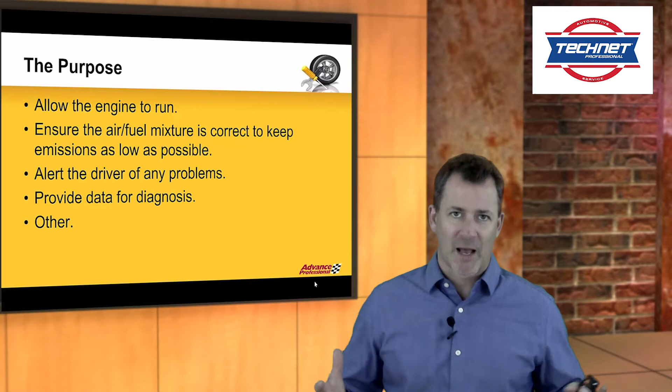It sends a lot of data to a lot of other computers. It keeps an eye on a lot of things, including where you are sometimes. And let's just say right now that the engine control system is very, very complex. So the simpler we keep it, I think the better off we're going to be.

Now, this diagram that you can see here just shows the very basic process that goes on with engine control. It's a computer. You'll see it called the ECM or the PCM. There's all kinds of acronyms for it. The bottom line is it's a computer, and computers really do three things.

They receive input, and it doesn't matter whether it's your computer that you type on every day, that input is you typing. In an engine control computer, it is input from various sensors throughout the automobile. It receives this input, it does some math, it does some processing, and then it controls some sort of output.

So the inputs that you can expect for the engine control system might be from the mass airflow sensor, from a crank position sensor, a camshaft position sensor, maybe the O2 sensor, various temperature sensors, and there's only a couple listed here. This is only a real brief list of the potential sensors. It takes input in terms of voltages or signals from these different sensors, and it does some sort of processing.

And there are really three different ways that it processes it. It either does the math on its own, because it has the programming to do that, or it has pre-programmed data, and it says, hey, you know what, when these values come in that look like this number from these sensors, then here's what I do.

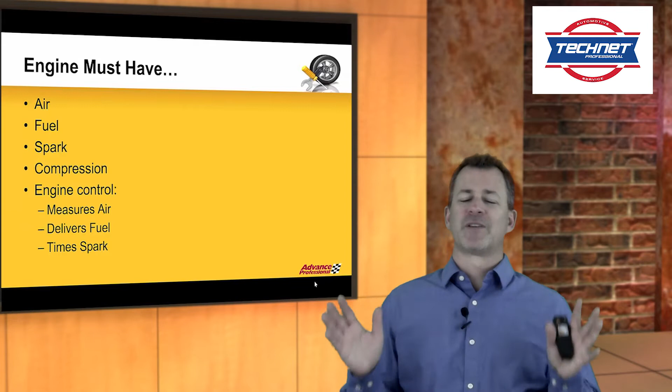The engine control system, with all those inputs, processing, and outputs we just talked about, really just measures the air, delivers the fuel by opening or closing a valve, and times the spark - because if the spark doesn't happen at the right time, nothing good's going to happen. Air, fuel, spark, compression - the engine control will measure the air, deliver the fuel, and time the spark. If you want to get really technical, it can control compression today, but for all intents and purposes, let's say it doesn't have a whole lot to do with compression.

The very basic fuel injection system being controlled by the engine control system is comprised of these inputs - some sort of measurement of how much air is coming into the engine. That would be the MAF sensor or the MAP sensor - the mass airflow sensor, if you will, or the manifold absolute pressure sensor. That determines the air that's coming in. It will have one or a combination of those.

It's got crank sensors and cam sensors because it's going to tell it where the pistons are and where the valves are in terms of their physical positioning, so we know when to deliver the fuel and whether they're open and closed or ready for us to spark.

Temperature sensors - we got to know what the temperature is of the incoming air, because that will determine how much fuel we should add or take away. The colder the air, the more fuel we're going to want to give it. Because it's got more oxygen in it. So we use all of these sensors to gather the data so we can do some math.

The last sensor here, that we'll get back to in a little bit, is the oxygen sensor - that's a very relevant input. It's a feedback sensor. It does look at what the result of all these outputs were, but it's a critical input for the next fuel injection cycle.

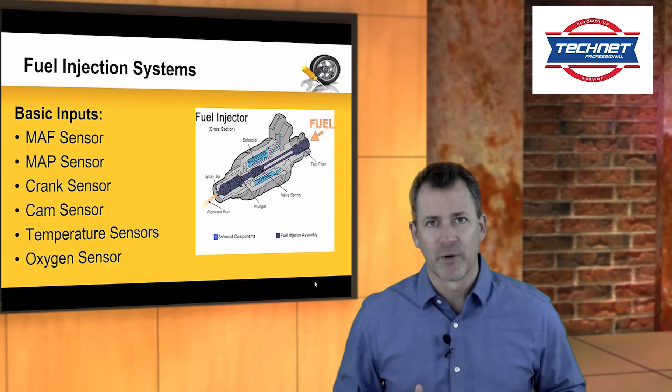Now, of course, if we're going to have fuel delivered through an injector, we've got to have some fuel components. Here are the fuel components that are going to be controlled as part of the engine control system. You've got the fuel pump, the fuel tank holds all that fuel, and you may have a pressure regulator in the tank - usually today as part of the fuel pump, sometimes still separate. There's fuel lines, and this electronic control module is actually going to run the fuel pump, and you may even look at fuel pressure.

So I could have a fuel pressure sensor as part of this as well. There are many, many components that the engine control system has to control. Remember, it's inputs, processing, and outputs. That's all it is. You don't need to know the nuances of all of that.

Some of the ignition system components. Remember, we're going to deliver fuel. We're going to have a tank full of fuel, and a fuel pump we'll turn on to pump that fuel up to the fuel injector. The injector is just an open or closed door. Once we open the door and let some fuel in, at some point we need to give it a spark to ignite this. That's what the ignition system does.

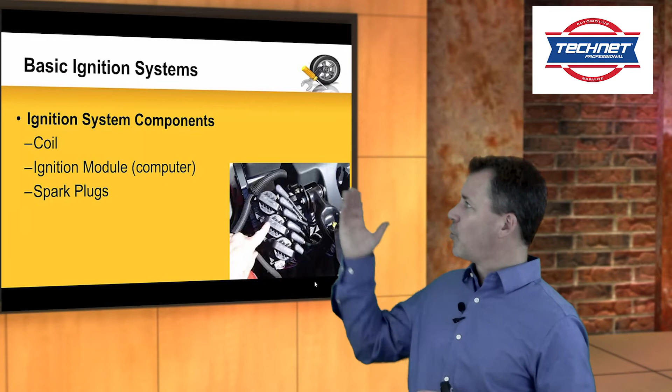The ignition system components, real simply, are a coil, an ignition module which is a separate ignition computer, and some spark plugs. Do you want to throw in the distributor cap, a rotor, some spark plug wire? Sure, we could talk about that too. But today's automobiles don't have any of that stuff anymore. They've got coils that sit right on top of a spark plug, and a computer that turns that coil on and off to create the spark. We won't get into how that happens, but just trust me, the computer turns the coil on and off, and the spark plugs happily spark away to ignite the fuel we've delivered through the fuel injector, which is an open or closed door.

Now, we do need some input in order to control the ignition system, just like we needed inputs to control the fuel delivery portion of the engine control system. We've got to look at how fast the engine is spinning. We've got to look at where the camshafts are, because that tells us whether these valves are open and closed and whether we're ready to actually create a spark. A lot of that data is processed by the engine control module. Some of it may also be processed by the ignition module. Oftentimes they will work together to time exactly when that signal gets sent to the coil to turn that spark on and off, real simply.

Now, engine control was one thing. That was mixing air and fuel together. All those inputs just determine how much fuel we're going to deliver. We have very little control over how much air, other than what we do with the gas pedal and how far we push our foot down on a simple system. Today's systems actually operate the throttle with an electric motor, and your foot just tells it how far to go.

We monitor the air. We determine how much fuel to deliver to the system. But then, based on our decision, we're going to have too little or too much fuel, and all these other chemical situations happen, because this is all combustion chemistry. Based on what conditions were present and what our decision was in terms of how much fuel to deliver, assuming we're the computer, we have emissions. We have certain chemicals that come out the tailpipe that we just don't want because they contribute in a negative way to everything that goes on around us.

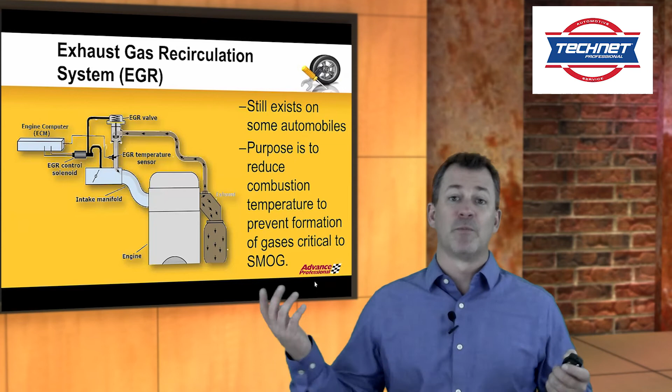The other major emission system that you deal with every day is the evaporative emission system. It's there to capture fuel vapor. That car sitting out there, whether it's 30 below zero or 130 in Phoenix in the summertime, that fuel is sitting there and evaporating. We can no longer vent it to the atmosphere like we used to. Now we have to capture it, hold it, and burn it again when conditions are right. So its job is to capture the fuel vapor, hold on to it, and then recycle it to be burnt in the engine.

The engine control system has to know how much fuel vapor we have so it can control the outputs, letting a little bit in while giving it fuel so we don't mess up our air-fuel mixture. It also has to monitor all of these emission systems for proper operation, which is federal law. In its basic form, it figures out how much fuel to combine with incoming air to make the engine go. In its more complex form, it monitors the air coming in, figures out how much fuel to deliver, and looks at what came out the tailpipe to modify its next decision and reduce emissions. On top of that, it has to monitor all these components for proper operation.

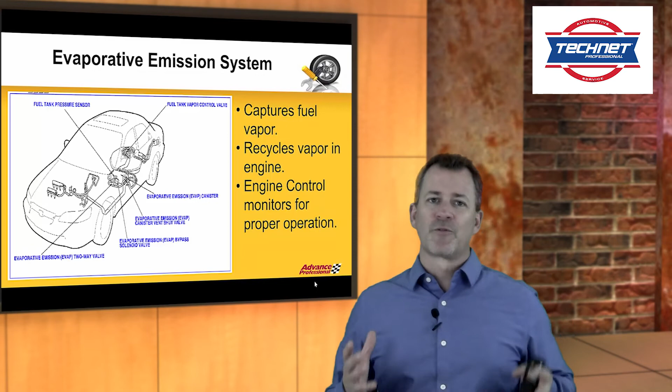The last emission piece is the catalytic converter. I say last piece because there are other devices we won't talk about here—these are the three major systems today. But the catalytic converter is probably the single most important emission device on the automobile. Its job is to burn any unburnt fuel found in the exhaust. The science behind catalytic converters is extremely complex, and we won't get into that, but just know it needs specific oxygen levels and specific fuel-in-exhaust levels to work properly. So the engine control system is always modifying its outputs to try to keep the cat happy. This device is also constantly monitored by the engine control system.

It looks simple, but it's actually quite complex. No, there are no moving parts, at least in this one—yeah, there are a couple out there with some moving parts, but we won't go there. It looks simple, but chemically it's very complex and does a very, very important job.

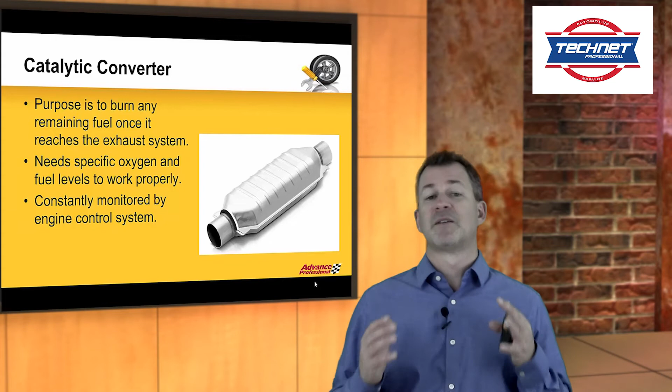Now all of this comes together in what we call the feedback loop. The engine control collects data on how it did—it does the input, processing, output thing. It takes the sensor data, does the processing we talked about, and then controls motors, lights, solenoids, all this good stuff. Then it takes certain sensors in certain positions, such as the O2 sensor in the exhaust, temperature sensors maybe on the EGR system or in the engine itself, and position sensors sometimes, and it looks to see: how did I do? Sometimes it just makes sure the output actually performed what it was supposed to. So if a motor was told to go to a certain position, did it actually go there? That's the position sensor thing.

So that's very simple: okay, I told it to do it—yep, it did it, perfect. Other times it's: the air was coming in at this volume and this temperature, and I decided to give it this much fuel, and I want to see how much fuel is left over. So it uses the oxygen sensor to determine, hey, did all the oxygen get burned up? If it did, then it must have had way more than enough fuel. Did it not all get burned up? How much did I expect and how much did I really get? It takes this feedback, and that feedback becomes an input, and it modifies its output based on that next time. Probably more than what you wanted to know, but just remember: inputs, processing, output.

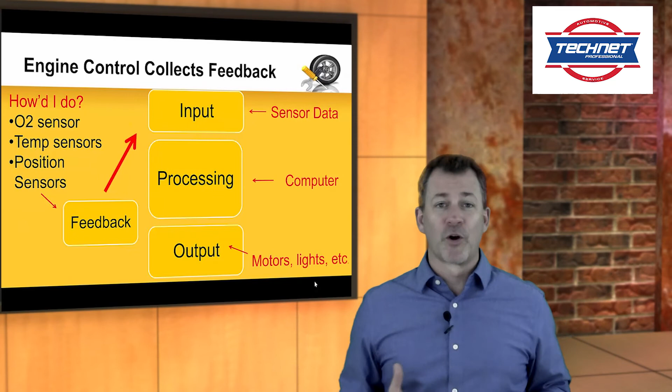When we talk about what could possibly go wrong with a check engine light, when that light comes on, what could it be? It could be anything to do with input, processing, or output. That's really simply what goes on. The system that determines where those problems may be is the OBD2 system, the Onboard Diagnostic System Generation 2. I'll keep this as simple as possible.

This is what controls the check engine light. And that check engine light, by federal law, has to turn on if anything might go wrong with the system that could possibly raise emissions levels to 1.5 times what that vehicle was certified at. So the federal government tests every automobile that leaves the plant to go out on the road. I say everyone, they sample them, and they say it has to meet these specifications.

If anything with the engine control system could possibly go wrong that could result in emissions rising, that check engine light has to come on. So the diagnostic system performs a series of tests, both on systems and on components, to determine how well they are functioning, and if they are functioning at the level needed to keep emissions low. The bottom line is, if the check engine light comes on, there's a problem that potentially affects emissions.

Here's the way I put it to a customer. If your check engine light is on, there's a very high likelihood that your fuel economy is about to suffer or is currently suffering. I connect fuel economy with a check engine light, and I say to them, we need to figure out what's going on here. It's going to cost you $150 to figure out what's going on. Once we understand what's going on, I can give you a repair estimate. And once they hear fuel economy with the check engine light, they usually go, oh, okay. Very different than saying, yeah, we can take a look at it for you.

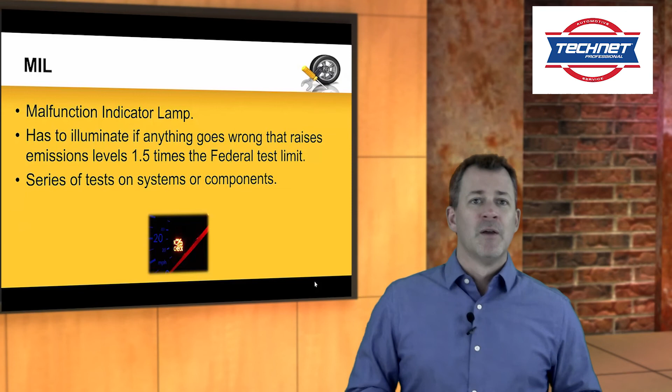Okay, I gave you the check engine light diagnosis process that most technicians will go through. Just as an FYI, this is also available on the ServiceSalesAcademy.com website.

They gather the information, pull all the diagnostic trouble codes and any data that's available to them. They'll record all of that. They'll go out on a test drive and try to duplicate the condition the vehicle was under when that check engine light came on. Yes, they can figure that out from the data. We teach them to do certain tests to figure out exactly what this problem is. That would be isolating the trouble. And then once they repair it, they have a repair confirmation routine that they go through.

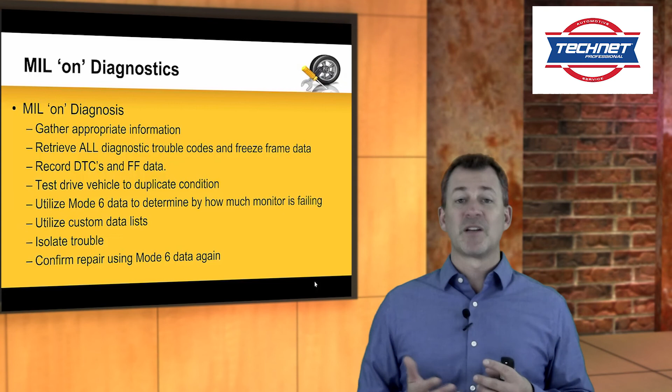So it's not simple. It's not crazy complex, but it takes time, and if they do it right, it will take time. Usually within 30 to 60 minutes, they can get to the bottom of most any check engine light issue. Not all the time - that might be good for 80% of the time. 20% of the time, yeah, it's going to be a little bit more complex. And that's just the way those things go.

So now you know a little bit of information about the engine control system, maybe just enough that you can explain it better to a customer now. In summary, the engine control system provides the right amount of fuel to make the engine run and keep the emissions where they need to be. The engine control also constantly monitors itself in terms of systems and components to make sure that they're all properly operating.

That onboard diagnostic system is the alert system - it just basically raises its hand and says, hey, I'm turning this light on. It means that we ran a test and that test failed. Well, why'd the test fail? That's what we got to figure out. It's not as simple as plugging in the magic computer and having it tell us what's wrong. It just tells us what test failed and what direction to go and look in.

If that light is on, chances are fuel economy is suffering, because remember what the engine control system does? It controls how much fuel gets mixed with the air that's coming in, and then all those systems surrounding that.